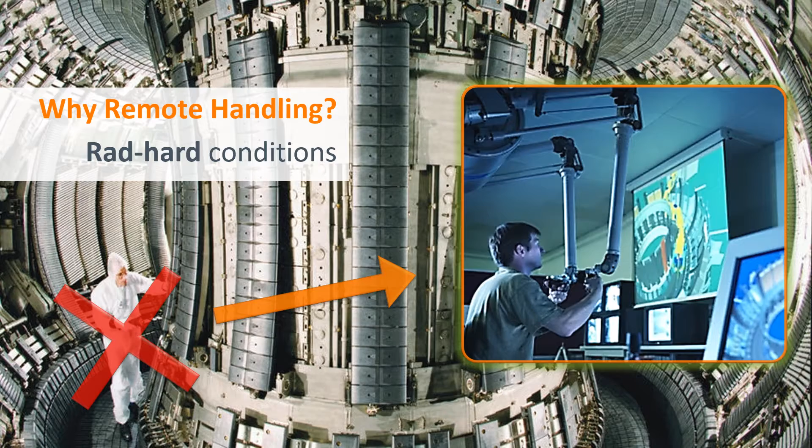Why remote handling? Given the radiation conditions, a human being is not allowed inside the reactor during maintenance operations. All the maintenance operations have to be performed remotely, as illustrated on the right image. Why mobile robots? Because some of the maintenance operations are transportation operations between the reactor building and the maintenance building, for parking, and for recovery and rescue operations.

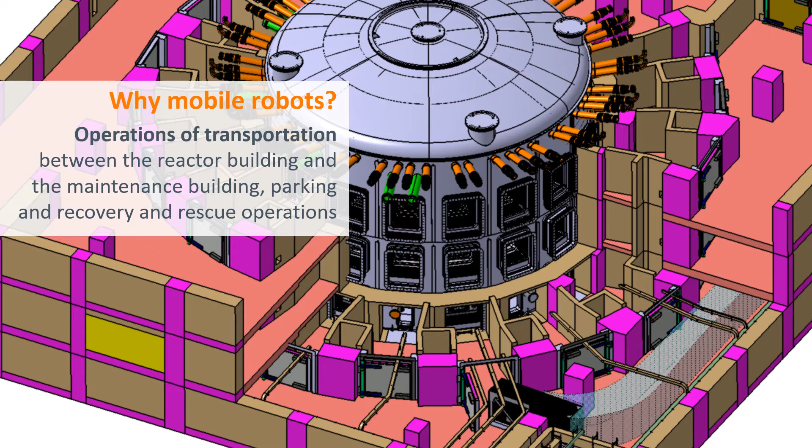We can see the image of the reactor building of ITER with 3 levels. At the bottom, you see a vehicle. This vehicle corresponds to the size of a bus. While a bus can weigh up to 20 tons, this vehicle can reach 100 tons. Why? Because of the lid to shield the activated loads to be transported.

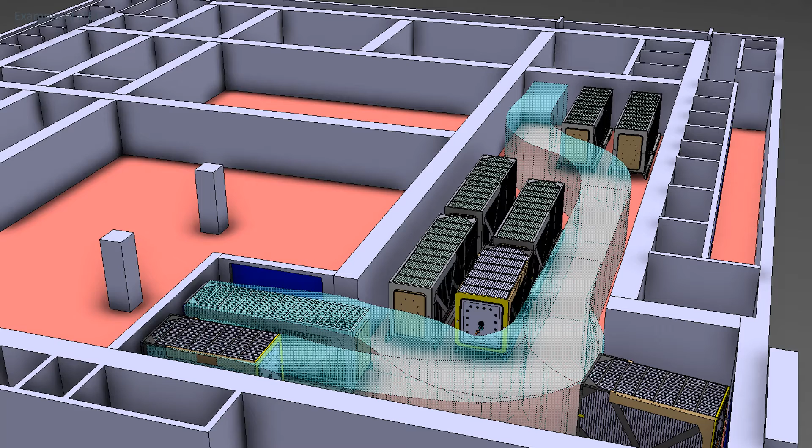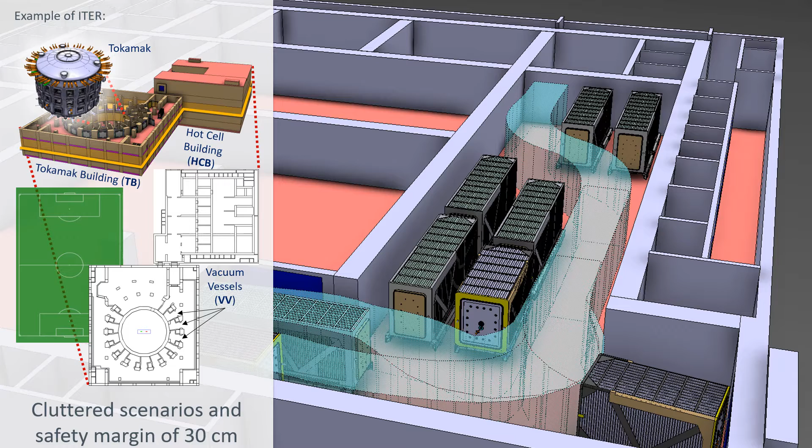But it's not a single vehicle. We expect several vehicles in very narrow space. To have an idea, taking into account again the example of ITER, each level of the reactor building has the equivalent size of a soccer field. However, we are talking about a cluttered scenario and the mobile robot has to navigate with a safety margin of 30 centimeters. And sometimes the safety margin can reduce to 10 centimeters. So imagine parking the car in your garage with 10 centimeters of safety margin.

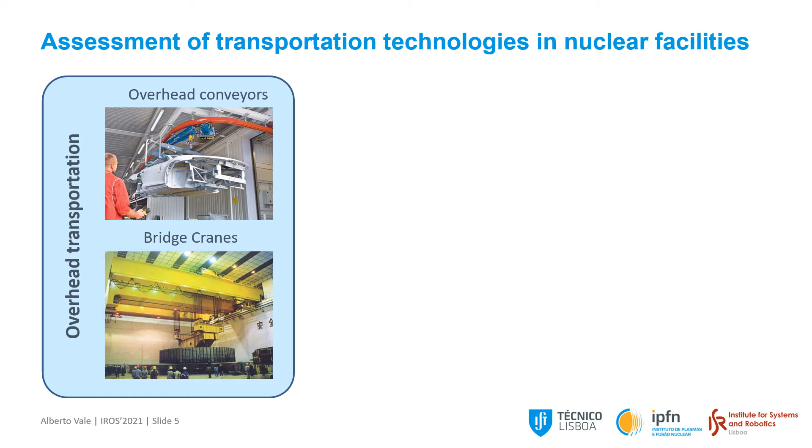So the first work done at IST was the assessment of transportation technology in nuclear facilities, starting with the most used in industrial facilities like overhead transportation, overhead conveyors, bridge cranes, up to the most common ground transportation like on-rail vehicles, air cushion vehicles, which was the first iteration proposed in ITER, to wheeled vehicles with different kinematic configurations, or more complex ones like a straddle carrier and combi lifts.

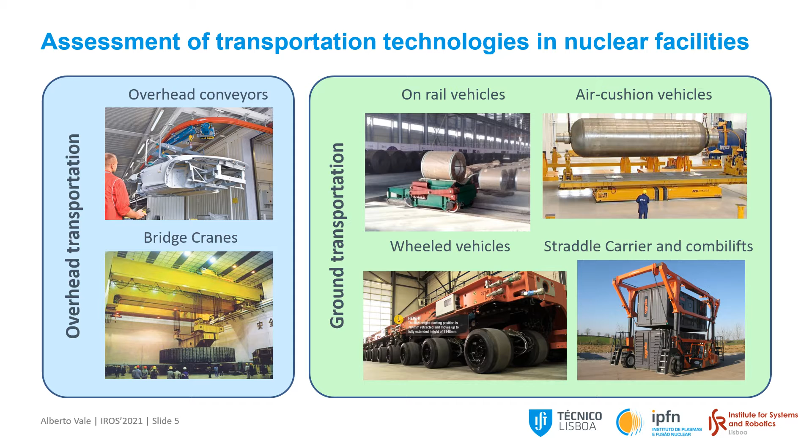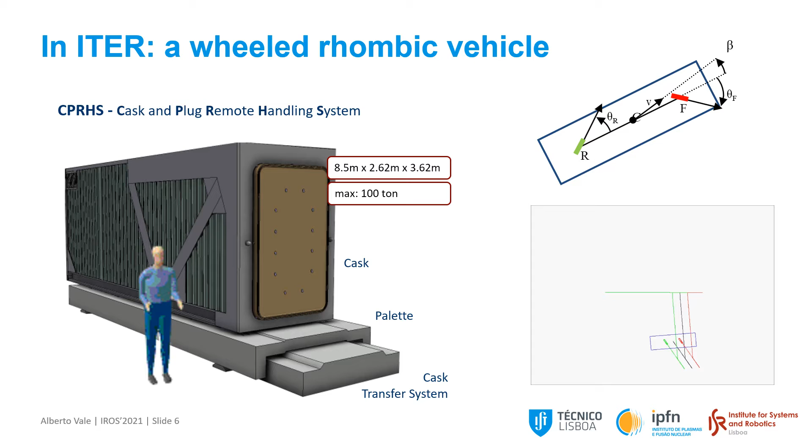So imagine that we have a car with 2 drivable wheels. With this type of configuration, we can perform crab motion, move forward, sideways, diagonally. We can perform rotations, or simply free roaming, a mixture of both.

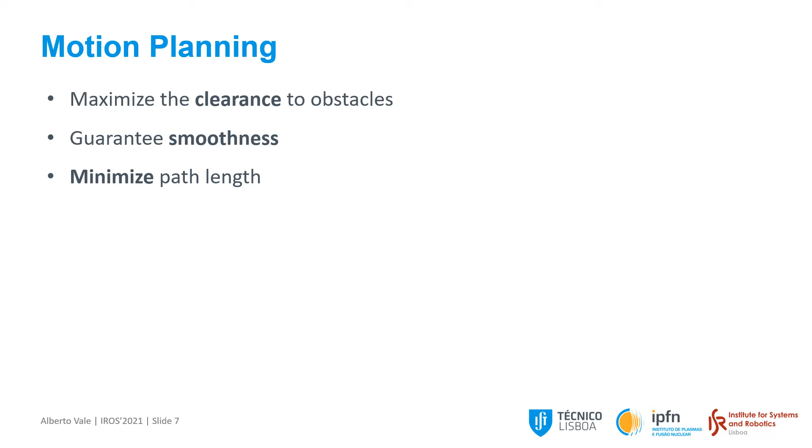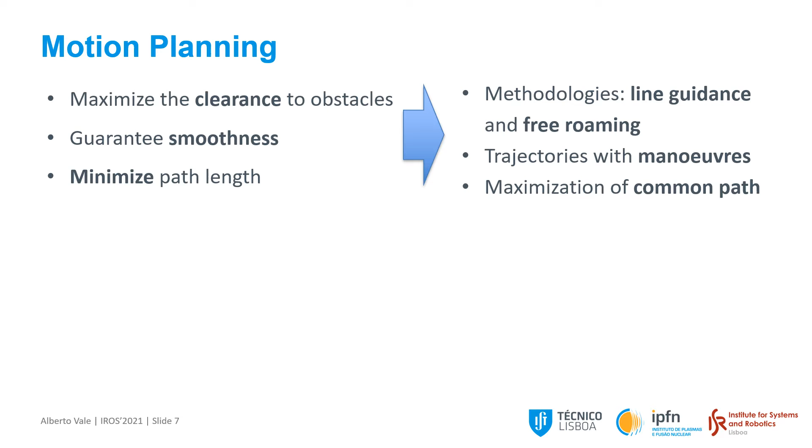So the next step is the motion planning. Maximize the clearance to obstacles, guarantee smoothness, minimize the path length. And it requires methodologies. We have developed line guidance and free roaming trajectories, maneuvers, and finally maximization of common path. We can see the first example of line guidance. Then we use the rapidly exploring random trees to get the free roaming.

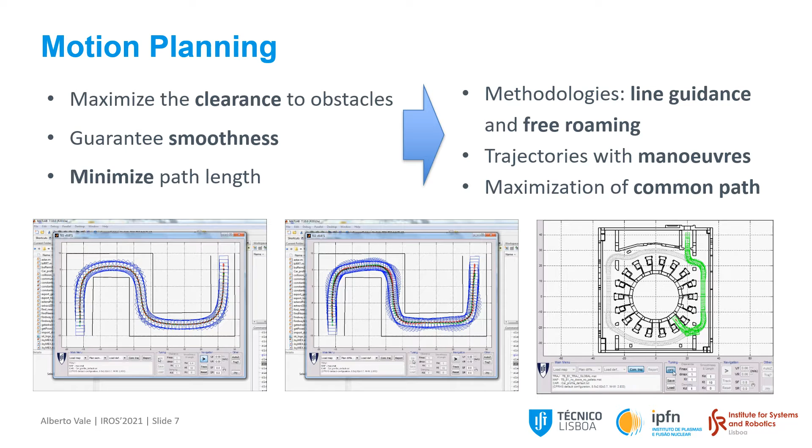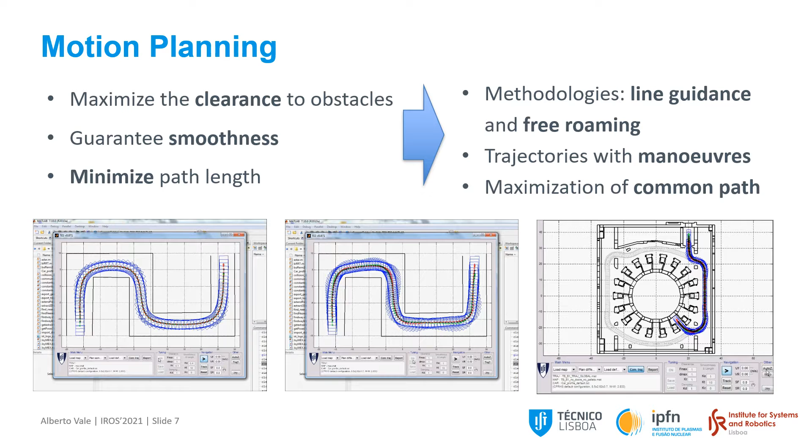And finally, the maximization of a specific path to a given port cell with a common path. You can see this vehicle is entering a port cell and the maximization of the common path, using again RRT. Not only for ITER but also for DEMO, the demonstration power plant, we have developed hundreds of trajectories for vehicles, and we also developed feasibility studies with modification of building design.

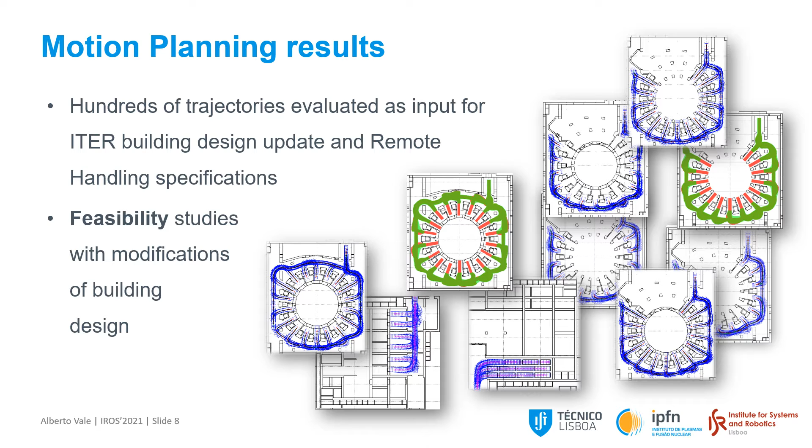Once you have the path, the next is the path following. We have developed 2 types of approach, geometric and kinematic. Geometric like Kelly, Stanley and arc path, and kinematic and nonlinear control based. We can see some examples on the pictures.

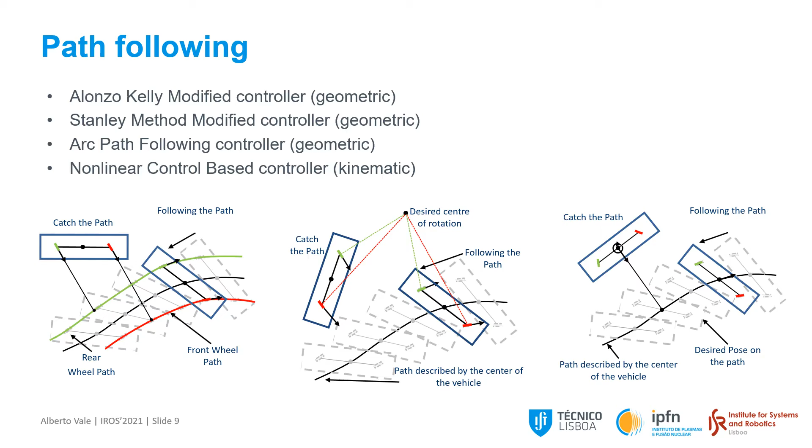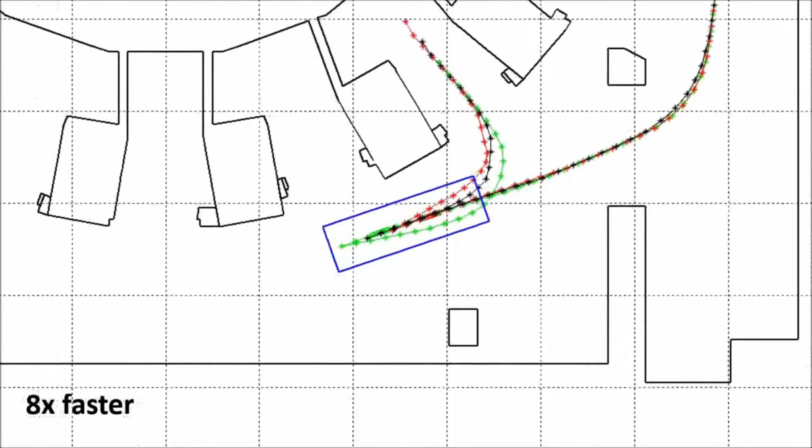This is an example of a simulation of one of the path following algorithms. We can see the optimized path computed for each wheel and also for the center of the vehicle, and the path following guiding the vehicle along the path. When it is approaching the port cell, the velocity is reduced and then a maneuver is required. And look at the clearance when entering the port cell. It's a very narrow space.

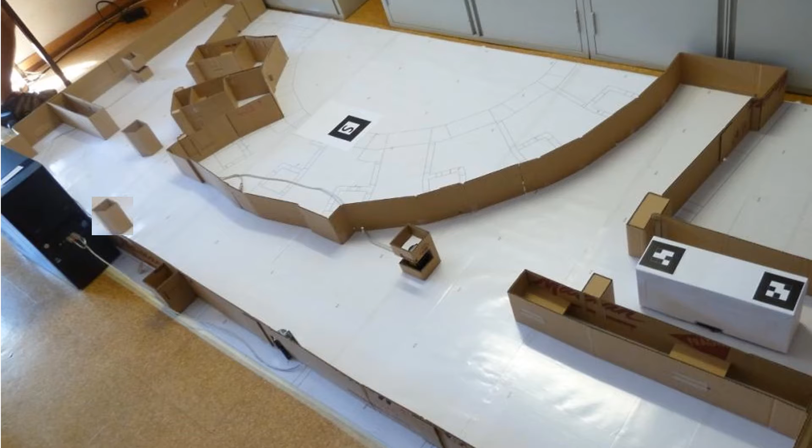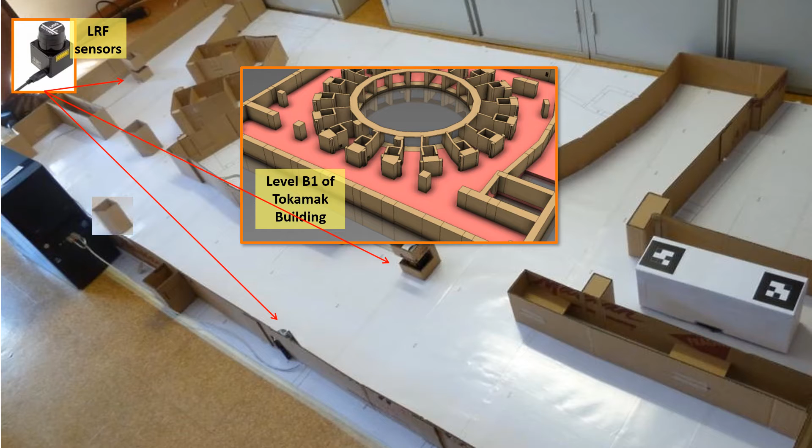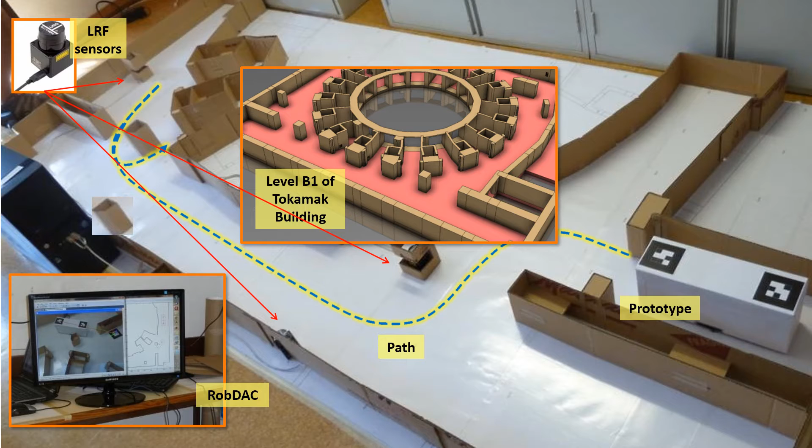We decided to replicate part of this scenario using a mockup. So we can see this is part of level B1 of the tokamak building of ITER, which is equivalent to the divertor level. We can also see the 3 laser rangefinder sensors, a prototype of the vehicle, and a computer with software developed by IST to acquire data and control the vehicle remotely. Then we computed the path, the same path used in the real scenario but scaled. And in particular, this prototype resulted in a patent, implemented in LEGO.

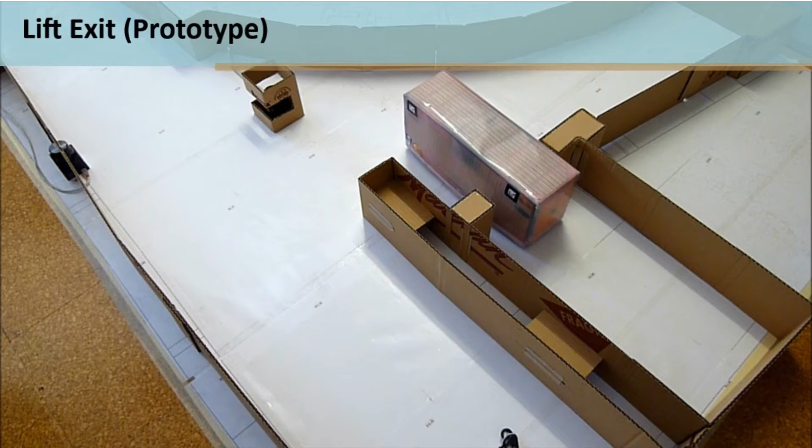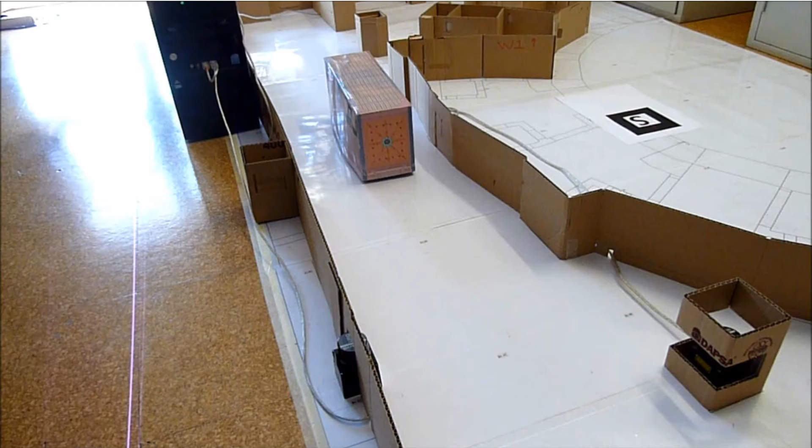In this video, it is possible to see the prototype following the optimized path, while the laser rangefinders are used to localize the vehicle in real time. When the vehicle is approaching the port cell, it reduces the velocity and performs a maneuver.

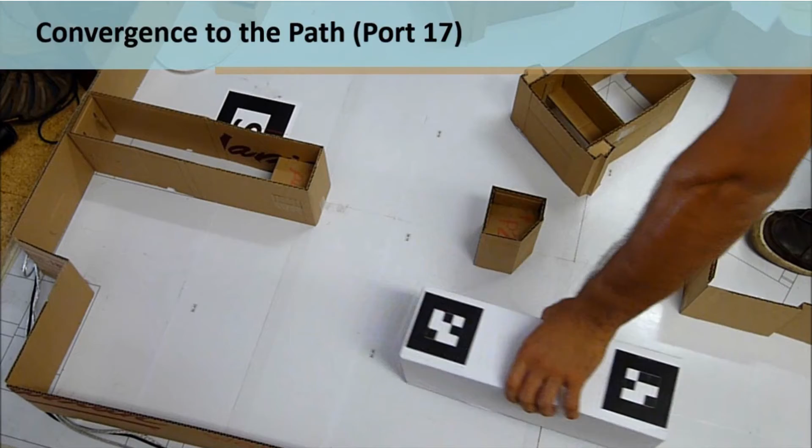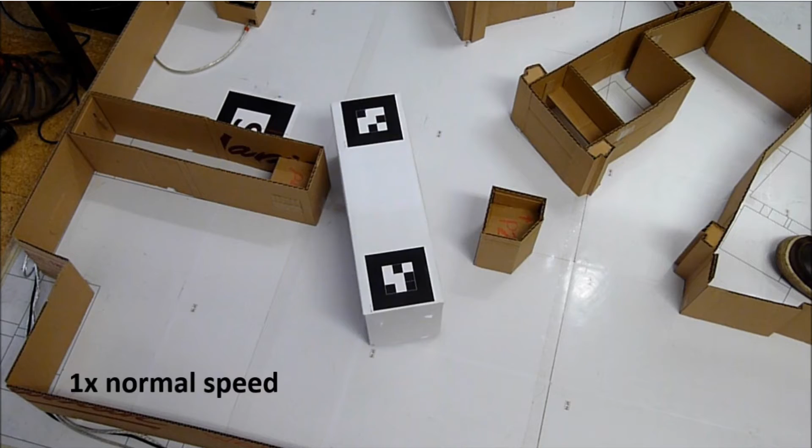The vehicle is entering port 16 of the reactor building, level B1. For instance, if you're trying to move the vehicle now to port cell 17, if you try to move the vehicle outside of the original path, the control always guides the vehicle to the right position and to remain on the original path.

The laser rangefinders are used to control the vehicle, while the image codes are only used for ground truth. Look at the clearance for entering a given port cell. It's a very narrow space.

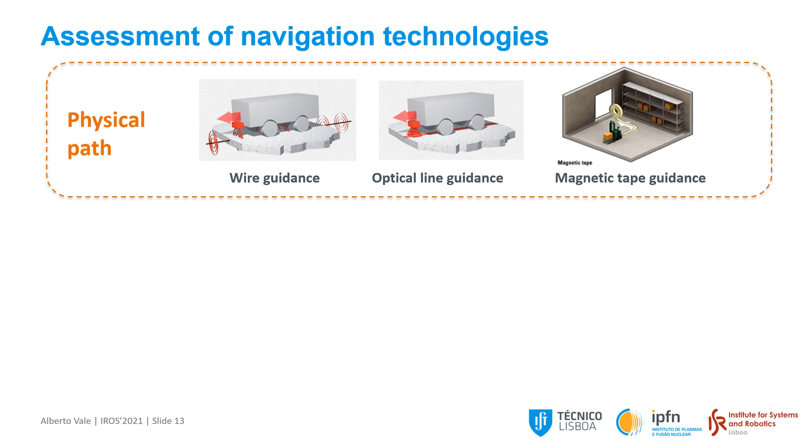Then we started the assessment of navigation technologies with physical paths like wire guidance, optical line guidance, and magnetic tape guidance, compared with virtual paths like magnetic gyro grid navigation, onboard and offboard laser rangefinders. Usually we use onboard lasers on the robots, but in these scenarios we combine not only onboard but also offboard for redundancy, since the robot transports activated loads. And finally also the motion capture systems.

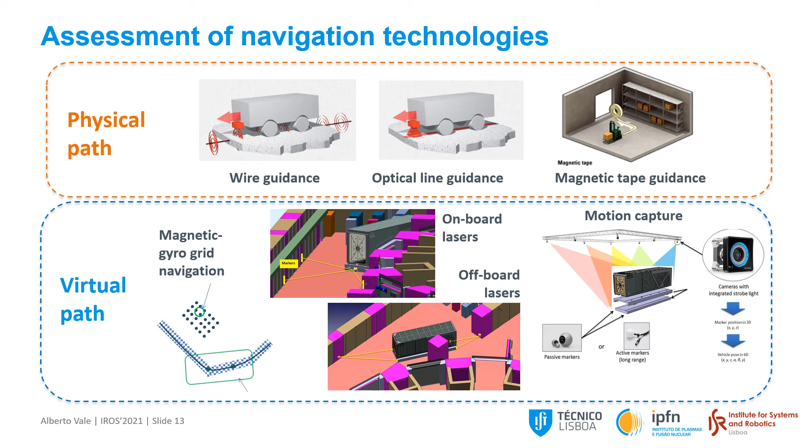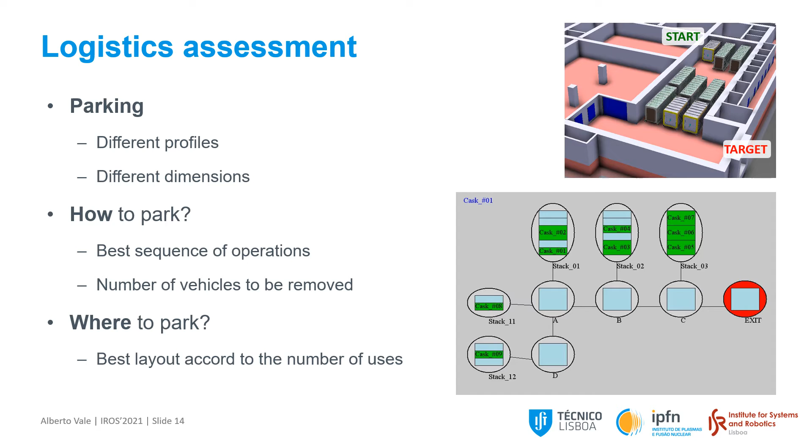Since we are not talking about a single robot, we have also developed algorithms for logistics, because you need to park different profiles and different vehicle dimensions, and we have to know how and where to park in the scenario.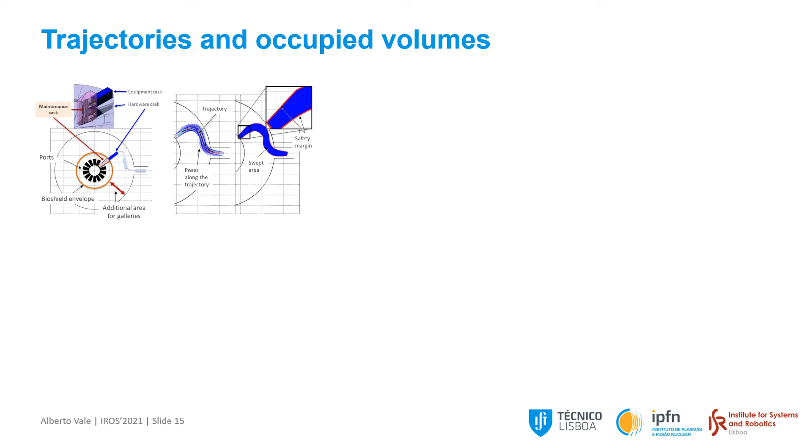Since we are talking about trajectories, we need to evaluate the occupied volumes required to perform these trajectories. It means the space that should be empty to guide the vehicle along the optimized path. So we get the optimized path, then we can see the pose along the trajectory. We convert this into a polygon, and then we extrude it to get a volume in 3D. So it results, for instance, in the DEMO reactor building, in something like this shape.

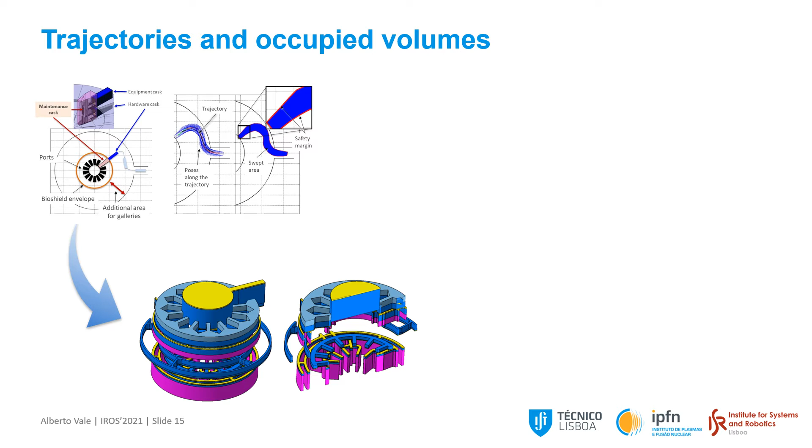And if we integrate with the CAD models, the colored part corresponds to the occupied volumes just for maintenance operations of transportation. We see different colors. The yellow corresponds to the vehicle itself, like a crane or the ground vehicle. The blue part corresponds to the space required for the loads, while the pink corresponds to the recovery and rescue operations. Just for comparison, assuming the size of an Olympic swimming pool, the entire space required for transportation operations in DEMO is equivalent to 60 Olympic swimming pools.

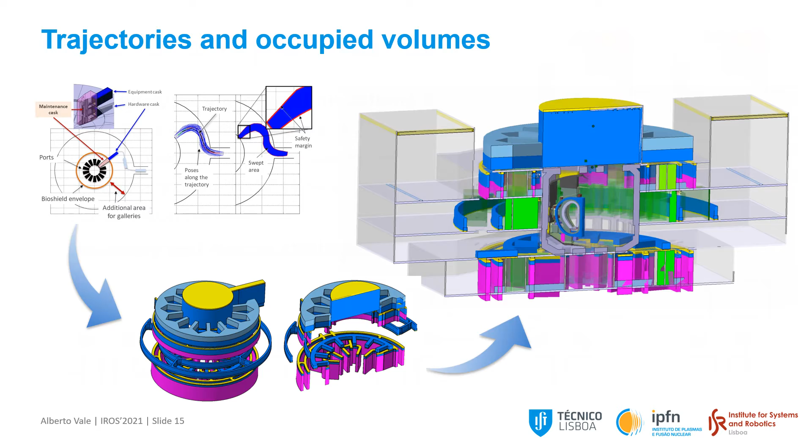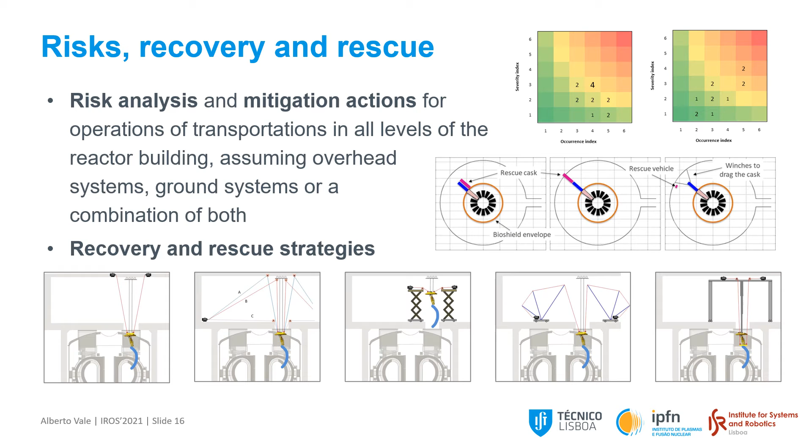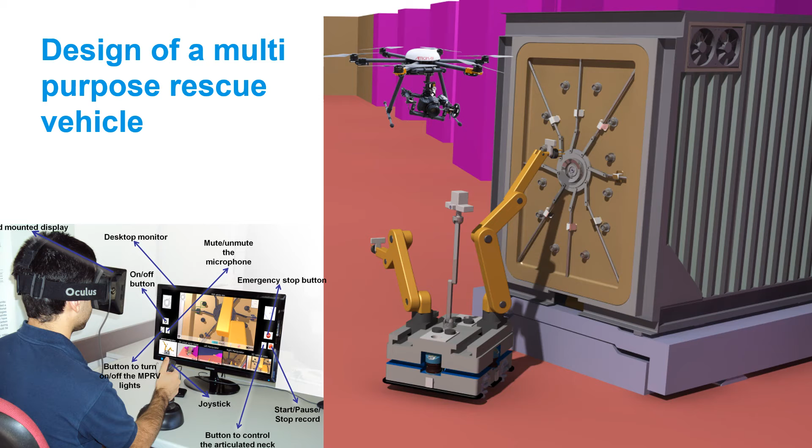Also for recovery and rescue operations, we designed multi-purpose rescue vehicles, not only the graphical user interface, but also the design of the vehicles. And we hope in the near future to also use drones for inspection.

And bootstrapping new ideas outside of nuclear fusion power plants, we started with the Formula Fusion project. It was building an omnidirectional automated vehicle with a similar configuration to the vehicle used in ITER, not so big, but something capable of being used in industrial facilities, with a payload of 250 kilos. We started to implement the first model, but given the pandemic situation, we have delayed, but we hope to resume this soon.

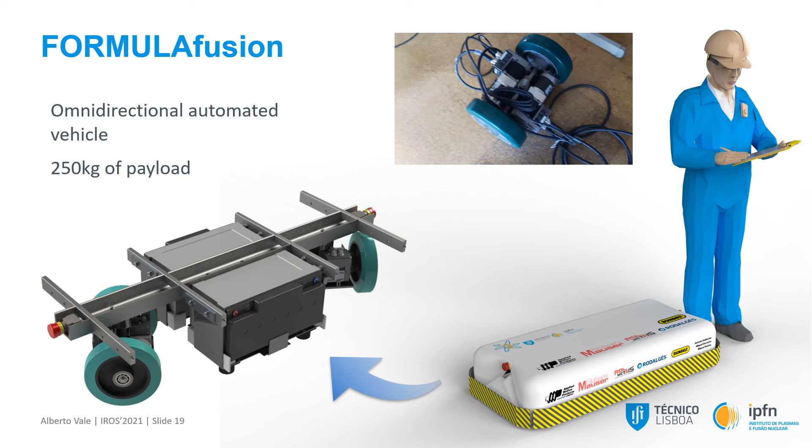Talking about industrial facilities, we recently engaged in a new project, Agile, to develop decentralized trajectory optimization for a fleet of industrial mobile robots in the largest automotive assembly plant in Portugal, which is Volkswagen Autoeuropa, in collaboration with Imagiza.

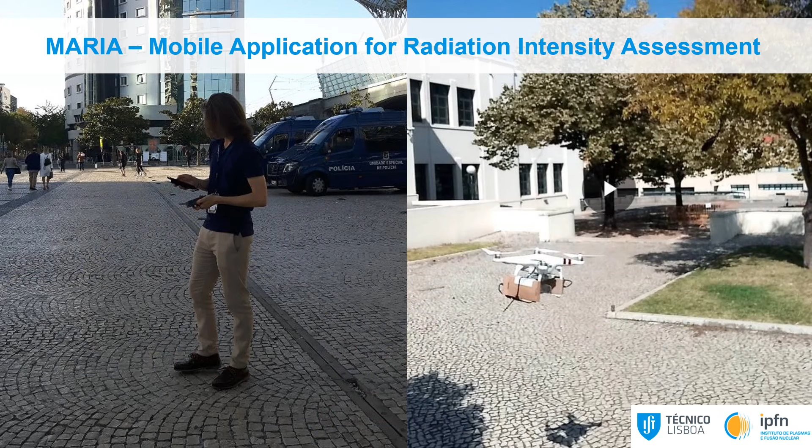Inspired by radiological protection needs, we decided to develop MARIA, a mobile application for radiation intensity assessment. A mobile application that can be installed on a smartphone, that combines the measurements of a GPS receiver with an affordable radiological sensor that can be plugged into the USB port of your smartphone. Then we moved on to put the same software on a mobile phone installed on a drone to see what could be done. And the result was interesting. We got a heat map estimation of the scenario easily.

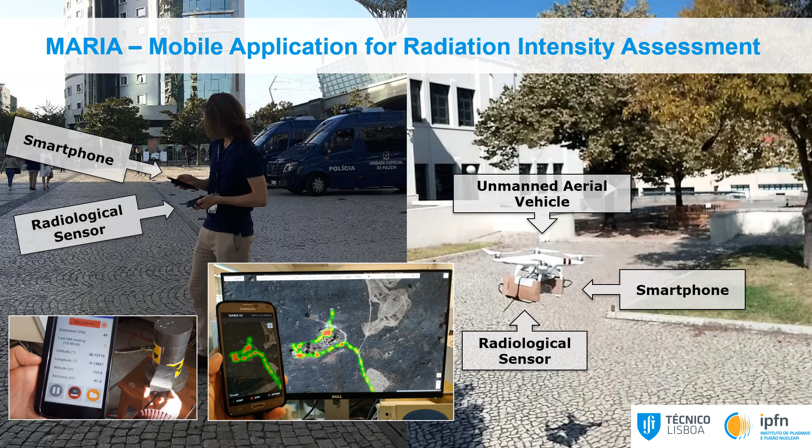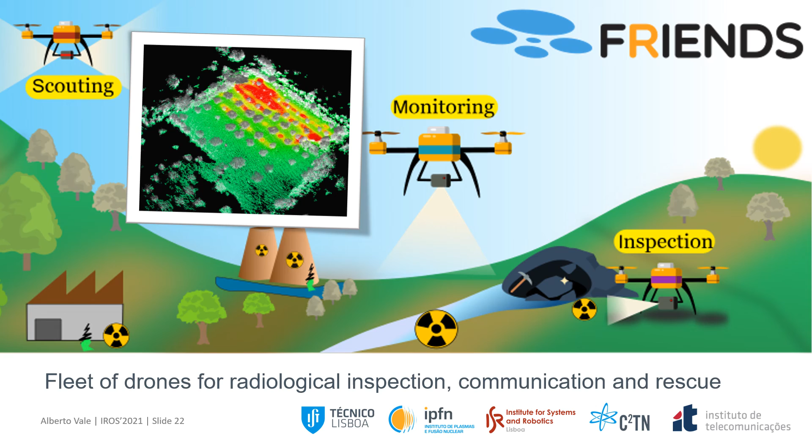So, since it works fine on a drone, we decided to move on to a more ambitious project, FRIENDS. FRIENDS is a fleet of drones for radiological inspection, communication, and rescue. We have performed the first experiments in real scenarios, in real old uranium mines, and we got the 3D reconstruction of the scenario, identifying the most critical points of radiation. Not only can we identify the hotspots, but we can also characterize them. It means which isotopes are present, and then characterize these scenarios.

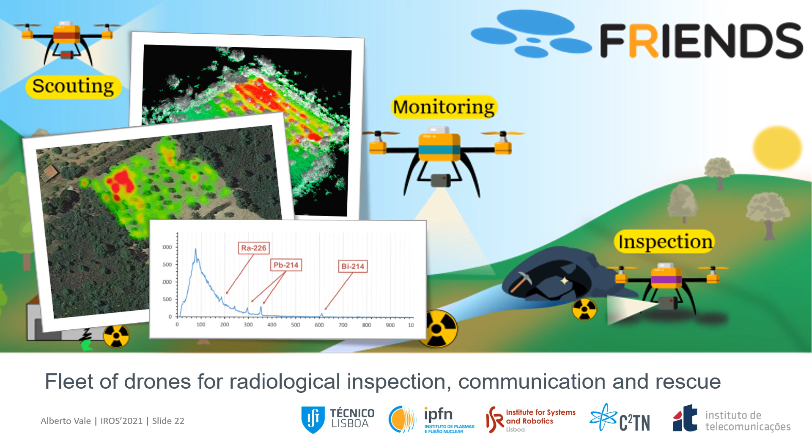New projects are coming, but we are still looking for new partners and new collaborators.